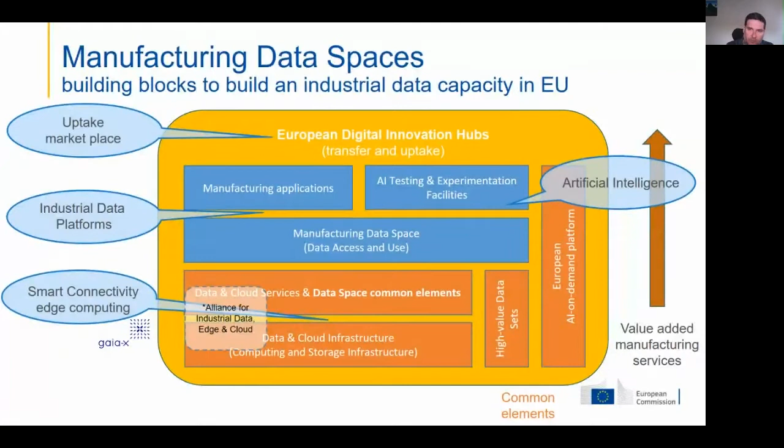On top of this, we want to make sure that there will be a transfer and uptake, not only by leading innovative companies, but by a vast majority of companies. And that comes with a number of technologies that we want to put in place along this development.

Now, we have selected two kinds of scenarios. One is a scenario of data spaces along the supply chain. Here, the idea is to have a very large number of different stakeholders, from suppliers to customers, to engineering, with proper collaboration between the different actors along the supply chain.

It might be on the communication of bill of materials, of opening order books. And you see this is really here testing, developing, starting from an embryonic data space to enrich these.

And then a second scenario, similar to some use cases found also in other platforms, which is more a scenario of asset management, where we would see a reduced number of stakeholders involved.

The manufacturer production site, who owns the machine, and that machine would provide its deep internal data to the machine supplier. So that means we already have two parties.

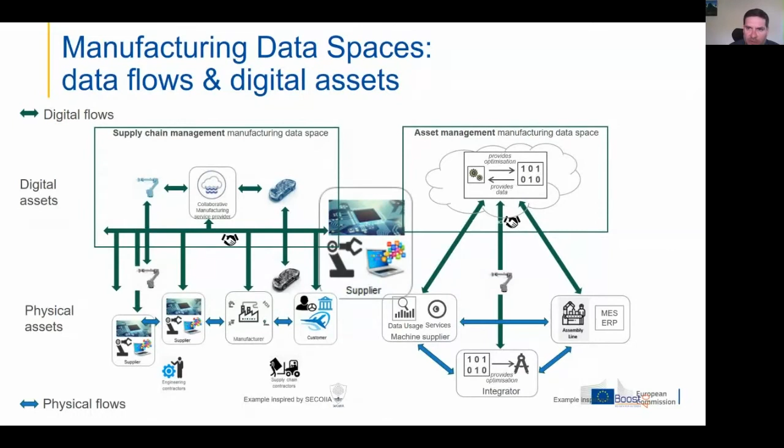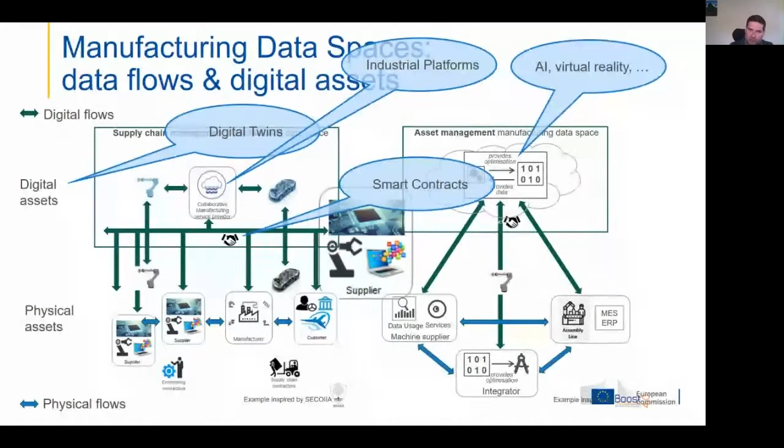And that gives a range of possibilities to deploy further a number of digital technologies, such as digital twins and smart contracts.

We have so far had a number of workshops together with you, together with manufacturing industry, together with suppliers of data platforms. The thing that we need to realize is we want to start small, but we want to scale fast. That's why we want to start from existing embryonic data spaces. The Digital Europe program, from which we are going to finance this, is not a research program. I really stress it is not a research program. So we need to have solutions which really start with existing industry agreement, which help to build a platform

that provides value to the manufacturing industry right away. That's why there is a need to understand what is the customer value when these designs are put in place. There are standards like the administrative shell from RAMI, which is currently being standardized from a number of points of view, from the semantics, from the ontology, as well as from the functional point of view. There is really a need to select these existing standards and to implement them.

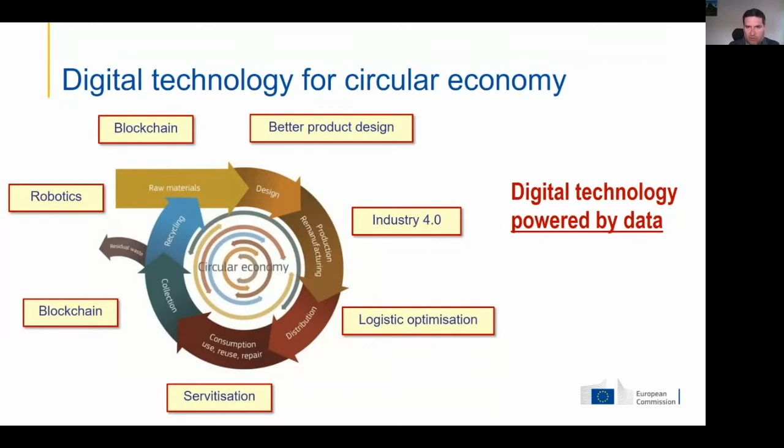This is not to be underestimated. At the same time, in Horizon Europe, we need to build the next generation of core digital technologies, not the technologies to be adopted maybe today in the manufacturing industry, but tomorrow. And that goes from microelectronics to photonics to AI to networking to high performance computing, with a number of efforts going beyond what is the current state of the art.

That's a research program. So that's really here, also when developing the next generation of chips, because they will be more power efficient, or they will provide more real-time features. It is also interesting here to have a number of use cases from the manufacturing industry to show, and to make sure that the core digital technologies will also be developed so that they serve a number of use cases in industry.

And really, once we have gone through all of these funding programs, the Digital Europe program to build the capacity, the research program to make sure that we have the next generation innovation, we also need to make sure that all of the companies across Europe would have the possibility to acquire the digital innovation, that they have really the right technology for the right purpose, which corresponds to their needs. We're not talking here of a transfer of innovation to go to market. It's really finding the needs of SMEs and helping them to go through a digital transformation.

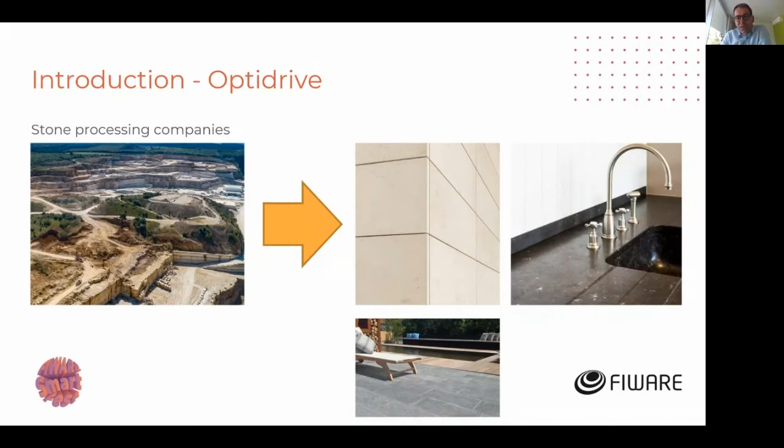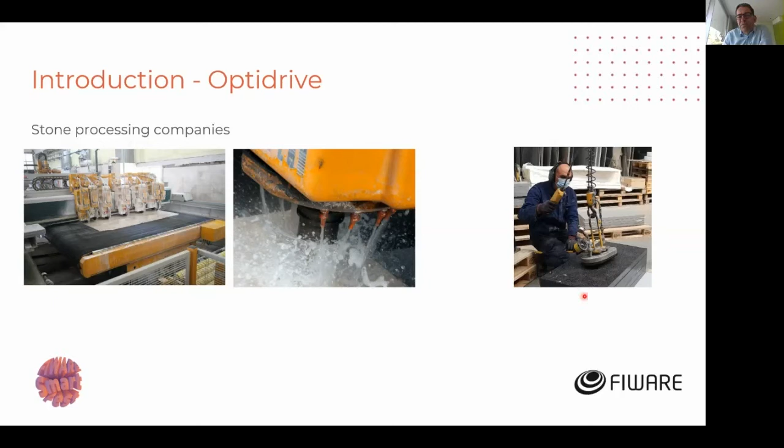Stone processing companies is the first thing I will explain. Natural stone is extracted from the earth in quarries, and finally the products are used for wall cladding, tiles, kitchen worktops, etc. The stone processing companies make brute stone into these products with different kinds of machines. Here we have a cutting machine, the laser cutting machine, or CNC machines. But finally, there is a lot of manual labor involved also.

My company brings robot automation into this environment. For example, here we have a robot for edge finishing of a stone slab. Here we have a robot for tending CNC machines, bringing the products in and out of CNC machines.

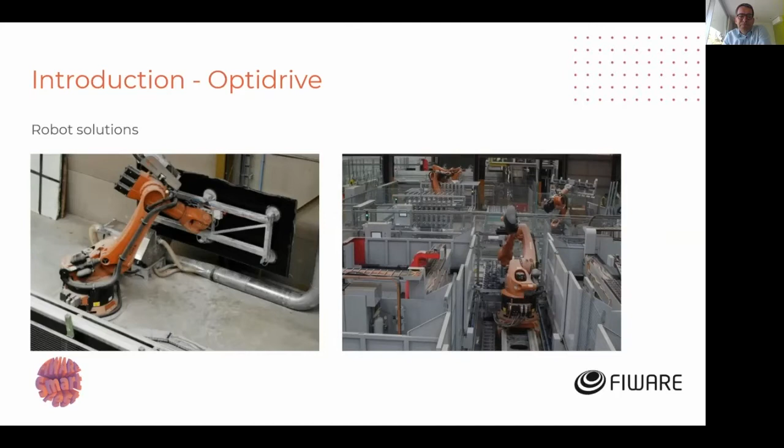The technology transfer experiment we did is within the framework of digital innovation networks. We participated here with the experiment, technology transfer experiment. Basically, the technology transfer experiment is about testing FIWARE components in a real industrial environment, specifically for us with robotics involved.

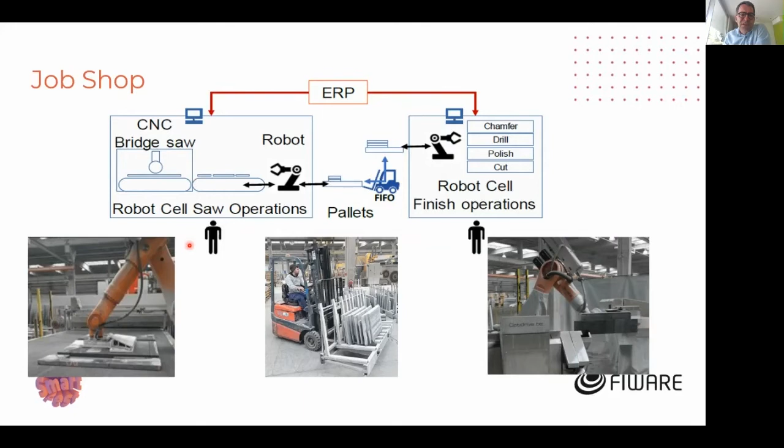The stones are moved around the factory just with the FIFO system - first in, first out - the stones are waiting to be processed by a certain production cell. The information flow is top down, or is in one direction. So the production cells receive information from the ERP system, but there is no information going back. And there is also no information from one production center towards another production center. That was not existing. This is a typical situation in manufacturing companies.

Within the technology transfer experiment, we transformed this towards the smart factory concept. We introduced the FIWARE components, the context broker in the middle with the data, containing data, communicating with the ERP database. The robots are bidirectionally connected with the context broker. And we introduced several smart services. Very straightforward, a monitoring service, a dashboard to see what's happening in the production.

Our client was very interested in this smart service - it's a manufacturability check. This check will verify whether a stone can be produced or processed by this finishing operation cell. Is it possible to do this stone with a certain size and a certain combination of required finishes? Is it possible to do this with this robot? You have to know that a robot is non-linear, has a non-linear behavior, and it's difficult to predict whether a certain size with a certain combination of operations is possible with this robot. This smart service will check that.

This check can vary in time. For example, a drilling tool is not available for the moment because it's broken. Well, then this smart service check will, for this time being, say that this stone cannot be done by this robot cell. Later on, maybe it's fixed, and then it's possible.

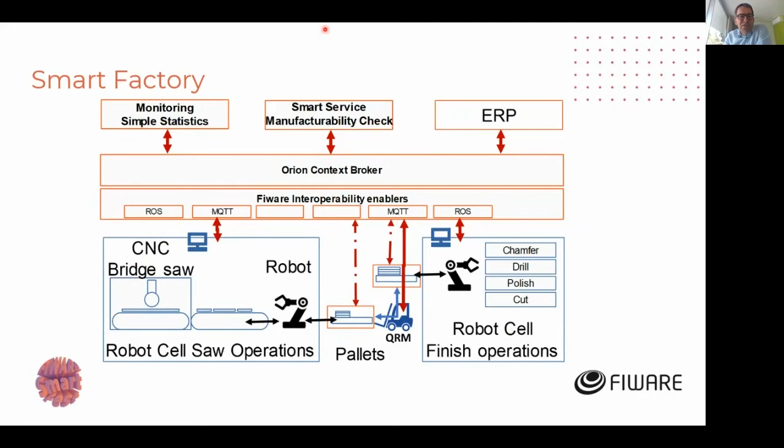Then another smart service is the logistics - the path or flow of the material - done with the QRM logic, quick response manufacturing logic. It's also a smart service. And for the operator on the manufacturing floor, it's very easy to verify. He takes his smartphone, checks a barcode, and immediately sees the priority of this pallet, where the pallet has to go. Without stress, rush orders can be done. So this is all the concept of a smart factory.

At the end of my presentation, we will show you the video where the success of the experiment is explained. Before that, I will finish my slideshow and explain the outcome of the experiment - we made a connectivity kit for KUKA robots. This is open source, available from this website. It is a connectivity kit that with tutorials easily explains how you can connect KUKA robots to the context broker. And if you do that, you have access to all other applications in the RAMP marketplace to make a dashboard and other interesting things.

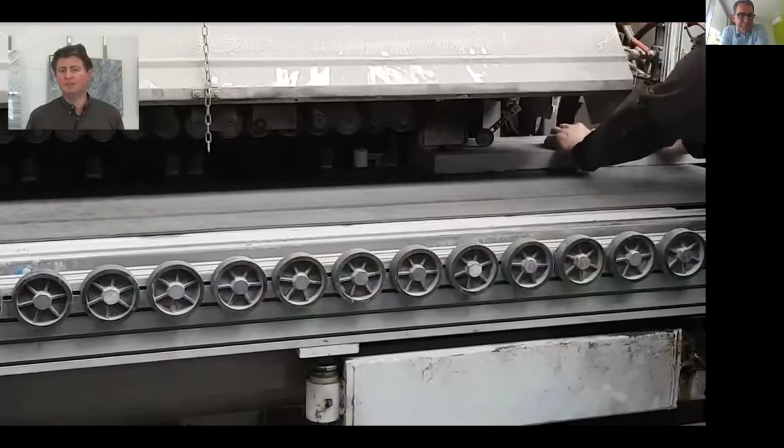René Natuursteen is a natural stone processing company located in Belgium. We produce high-end made-to-measure products like wall coverings, windowsills and kitchen tops using a lot of CNC work tool machines.

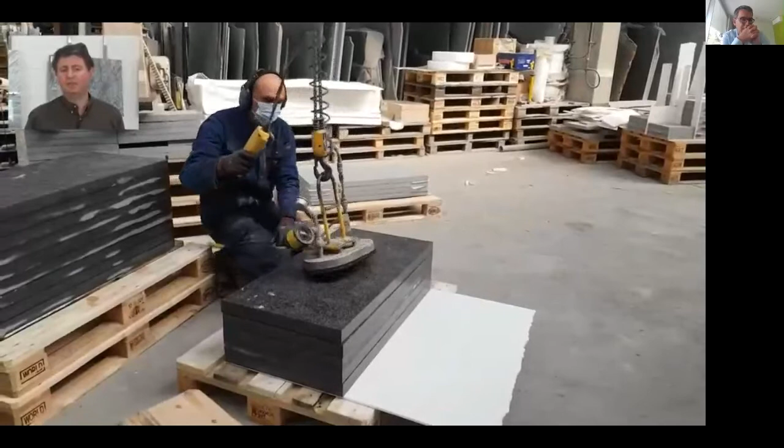The challenge for René is to produce high-end quality components in a very agile way and on a competitive price level. In other words, we need to be able to have a short turnover time and at the same time make sure our products are of the highest possible quality.

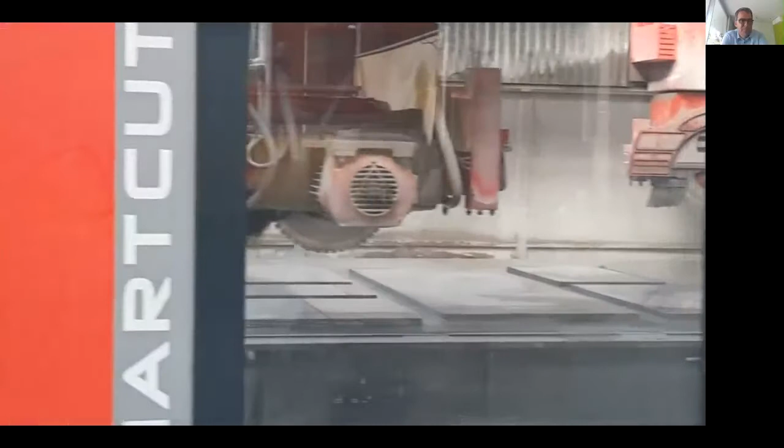Optidrive is a robot integrator. In this project, we integrated 2 robot cells in a smart factory concept. We did this by connecting the robot cells with a cloud database. We used the FIWARE standard and a Grafana component from the ramp. In this context, we developed 2 smart services: the manufacturability check and the quick response manufacturing service.

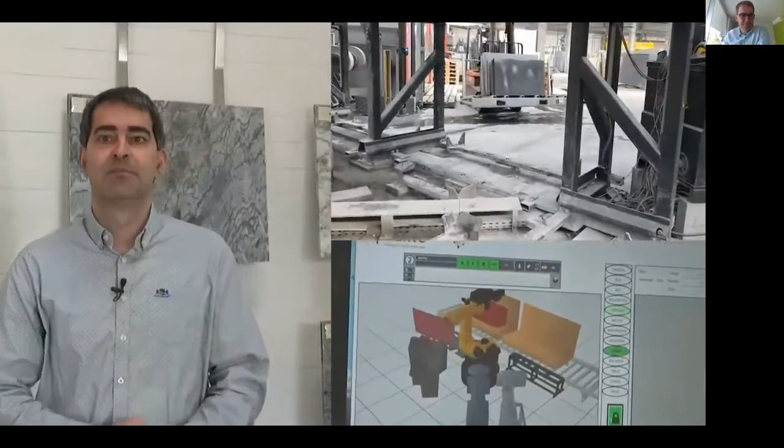There are 2 dashboards, one for the robotic cells, one for the pallets. All dashboards can be accessed from any device and also by scanning a QR code.

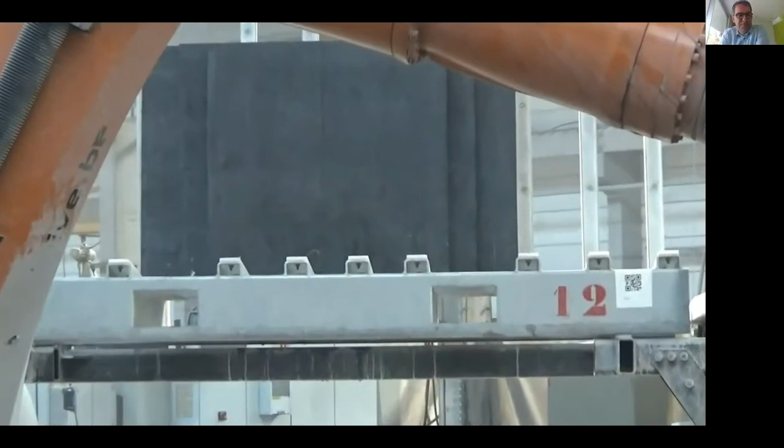During this project, we discovered the FIWARE standard and the Grafana components from ramp. We hope these become the EU standard for digital manufacturing. Starting from today, our robot solutions will be compatible with it.

We are very satisfied with the results of this EU project. Quick response manufacturing together with the Grafana dashboards mean a major step forward for us in efficiency and cost saving. The manufacturability service is a major step forward for us and a huge cost saver.

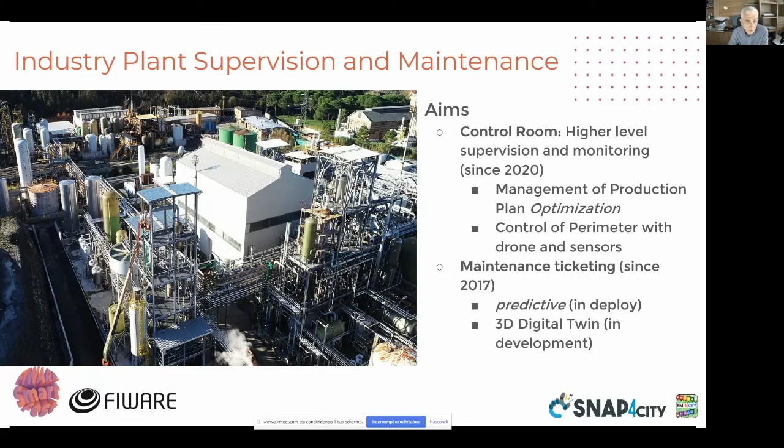The goal was to set up the control room for high-level supervision and monitoring. It has been operative since 2020 with the management of the production plan, optimization, and also control of the perimeter with drones and sensors. Since 2017, we are also managing for them the ticketing for maintenance. We are adding predictive maintenance and 3D digital twin in connection with the maintenance and monitoring of the data sensors.

So the architecture is represented in these slides. This is a functional architecture based on microservices that exploit the FIWARE component Orion broker.

And so we collect OPC UA and Modbus data from the field, and also from administrative servers, the information regarding the new product and business to be produced by the plant. So also the energy is also a cost to be taken into account, and some sensors arrive from drones for monitoring the perimeter through a LoRa gateway that pushes out to the NGSI Orion broker.

So inside we have storage, obviously, and support for digital twin and maintenance, and also data analytics for predicting maintenance and production plan optimization. For the front end, we use the dashboard builder, Snap4City dashboard builder, to show a larger set of dashboards and synoptics and 3D, and also Kibana open distro for the maintenance intelligence tools.

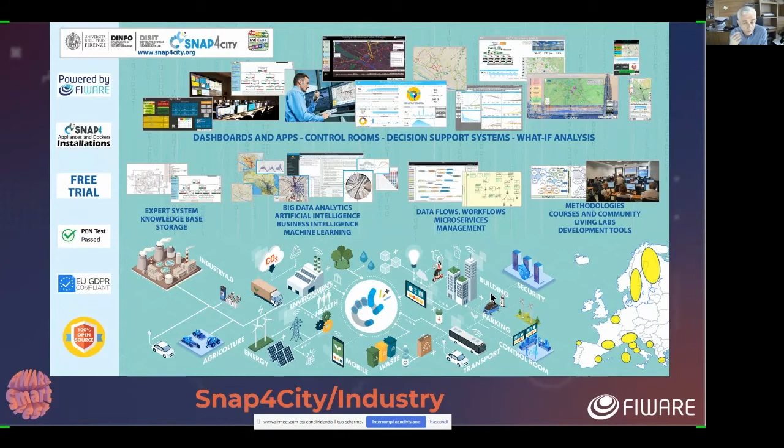So this is one of the first plants that we have done, exploiting the Snap4City solution that is powered by FIWARE, GDPR compliant, fully open source, that collects any kind of data and integrates data flow and workflow in the mechanism, not only for dashboards or data analytics, but also in an integrated manner to manage data flow and workflow. I am going to show you in more depth how it works.

The Orion Context Broker is the central part of the data gathering. All the data coming from the field and from the administration, and also from the devices, drones and so on, arrive in the storage passing through the Orion Context Brokers.

We also have IoT applications using Node-RED, installed on the edge for data transformation, which also produce messages in NGSI through the Orion brokers, and exploit other microservices of the infrastructure. The data analytics are containers scheduled and managed by Node-RED and IoT apps, which also produce results, pushing the data through the Orion brokers into the storage.

So the architecture has a number of containers with the IoT apps, also for the business logic of the several dashboards, and for managing data analytics, all with a uniform programming language, Node-RED, as you see here in the slides, in which you can create a data-driven process, data analytics, exploit the Smart City API, exploit business logic in the dashboard, govern the workflow in digital twin, and manage all the process, including the scheduling.

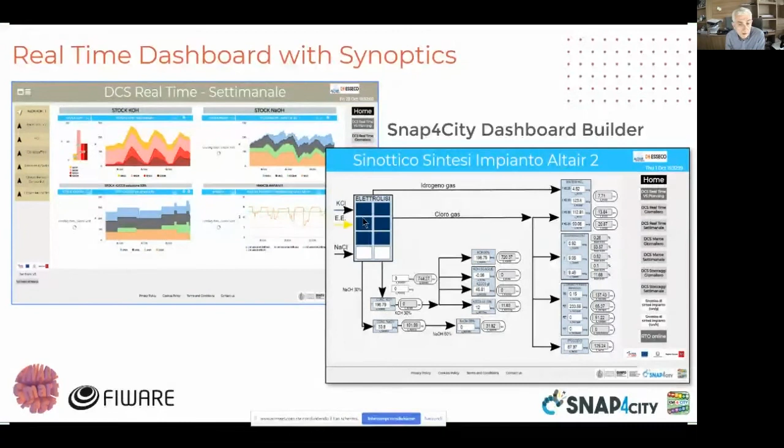So what you obtain are dashboards, several kinds, with trends, maps, and also synoptics, with end-to-end secure communication, with WebSockets secure and also HTTPS secure.

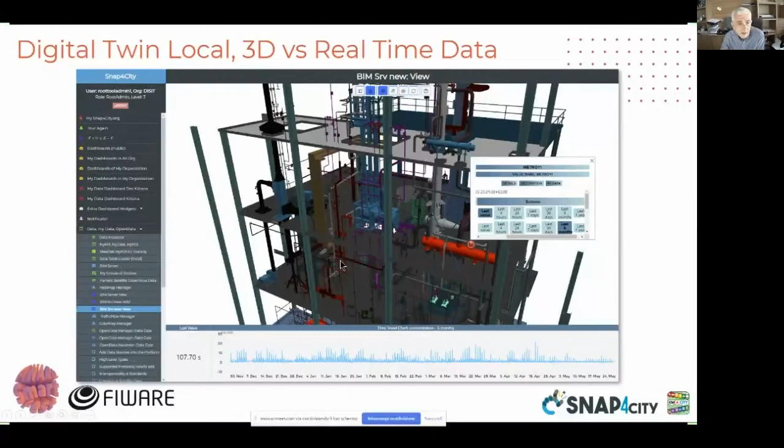In addition, we added a local digital twin. We had already developed something for showing 3Ds in the maps and so on, but recently we added the possibility to navigate in the plant, to have the real-time data, and to integrate this information in the dashboard, so that you can pass from the global to the local digital twin, and from the actual data recovered from the storage, exactly attached to the elements in the 3D.

In this way, when you have problems, when maintenance detects problems, or predictive maintenance predicts some problems, it's also possible to see exactly which area or which devices could be replaced, and where they are located, with navigation in the 3D shape.

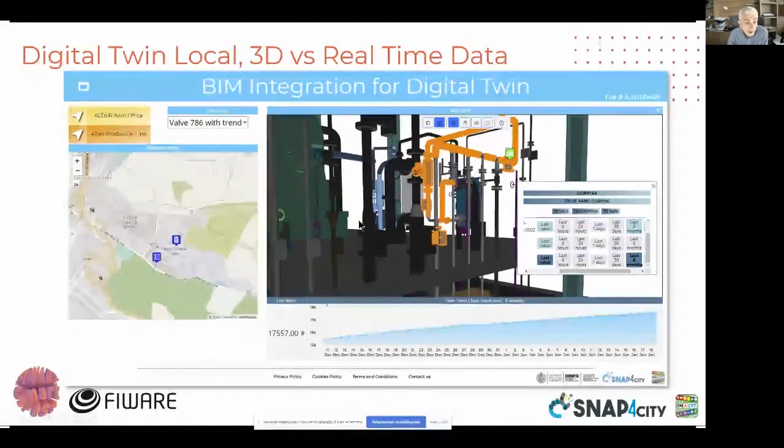So, as you have seen, the Orion Context Broker is central in the Snap4City, Snap4Industry solution. Orion enables the interoperability and ingestion of data coming from the field, with robots, sensors, actuators, drones and so on, but also with the control system, distributed control system, SCADA.

Most of the data are also transformed on IoT Edge by using Node-RED with the library of Snap4City, and they are both adopted in the IoT Edge and on cloud. You can also have some business logic to govern the logic behind the dashboard, and exploit data analytics. It is also another aspect.

So what we have at hand is the infrastructure and the solution. Presently it is used in a number of industry installations, all of them exploiting the Orion Context Broker, in all cases, both on-premise or on cloud. Some of them are directly on-premise of the company, because this is mandatory in most cases for industry.

It's also possible to make online development with low or no coding for the data analytics part, but all the rest needs very low code to create the solution. For this reason, we think it is an easy way to develop a smart and complex solution with large interoperability, exploiting the components of FIWARE, but also the capability of Node-RED, and the dashboard with synoptics and visual analytics, and also Kibana, which is a sister of Grafana in the open distro, is very powerful.

One pilot for Embraer, so in the aerospace industry, and the other one for manufacturing with ThyssenKrupp. What I'm going to present is the second one, so what was developed for ThyssenKrupp, and especially for the lift division.

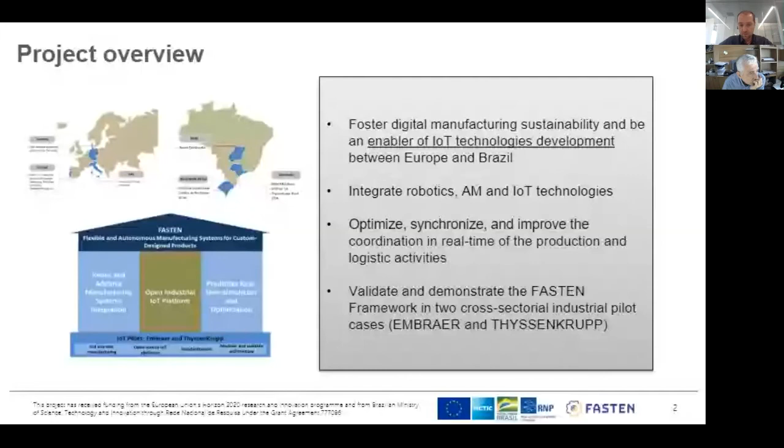Okay, the problems to solve here are mainly different. One is related to the communication between, in Brazil, the back office and the manufacturing area. So the idea here is to use the IoT platform in order to enable this communication.

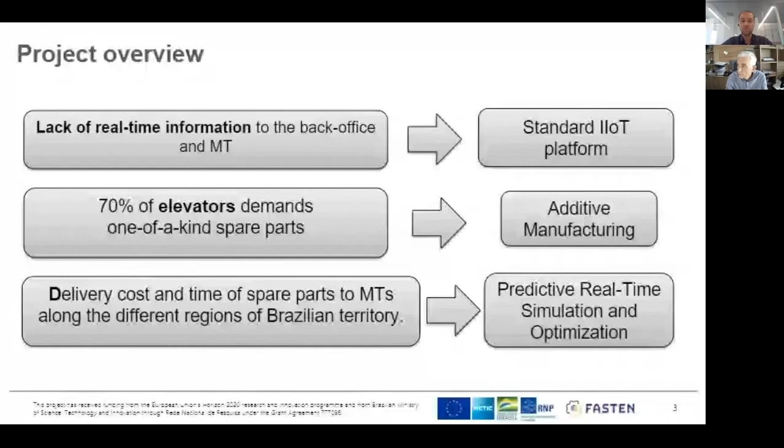Another topic is that more than 70% of the elevators demand one-of-a-kind spare parts. So conceptually, having a unique warehouse for the spare parts is inefficient in terms of cost effectiveness.

And so the idea here is to use additive manufacturing in order to produce the spare parts when needed. Last but not least, Brazil is a very big country, and so the cost and delivery time of spare parts is too much, especially because the infrastructure is often not well developed.

And here the idea is to use a predictive real-time optimization and simulation tool in order to allocate the production in a specific distributed cell in the country.

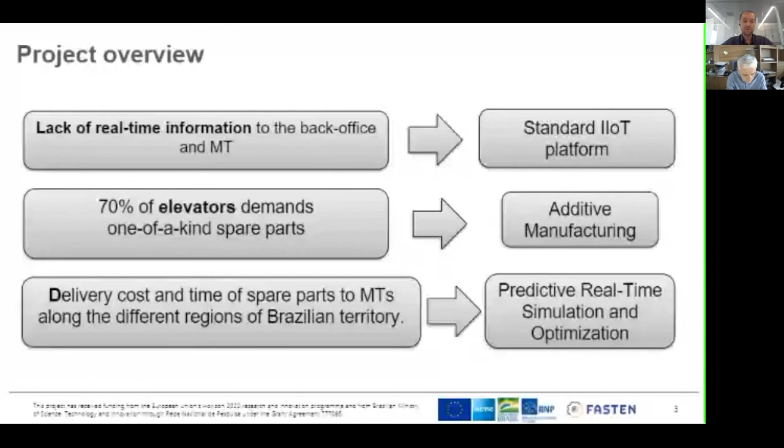What I mean by cell, these are the cells. So the idea is to create different cells in Brazil. These cells are called SRAM, so Smart Robotic Additive Manufacturing Cell. They could be different, but mainly there is the presence of a robot, an AGV, and a 3D printer.

So the 3D printer receives the order to produce a specific spare part. The robot takes the piece, places it on the AGV, and the AGV then delivers the piece first to the little warehouse nearby the cell, and then from there the delivery can begin, delivering the component to where the failure occurred.

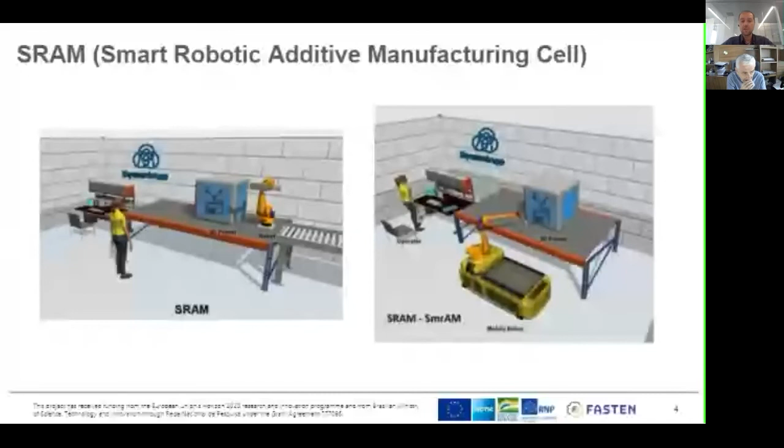So there are different cells, and the idea is to allocate and distribute them in the most optimized situation as possible. This allocation was done using a specific simulation and optimization tool in order to cover the major part of Brazil, taking into account different constraints, for example the presence of infrastructures, and the number of elevators in that specific part of the country.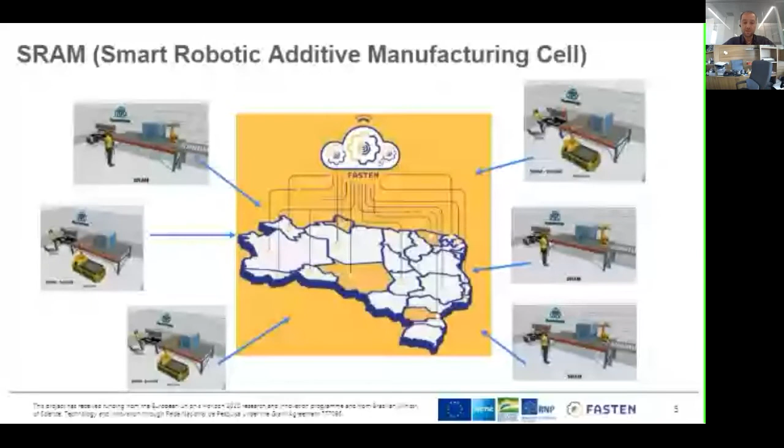So the idea is to promote the diffusion of open IoT platforms. Overall in the project, and specifically in this case in Brazil, a double perspective was carried on: the use of FIWARE and the use of Apache, testing the interoperability between them.

This is more or less the concept of the project. In the bottom part, there are the SRAM units. All the units communicate through an IoT platform with the higher level, mainly the legacy system of Thyssen, an optimizer tool, and the real-time monitoring and performance management tool. So mainly here there is a part of real-time monitoring of the cells.

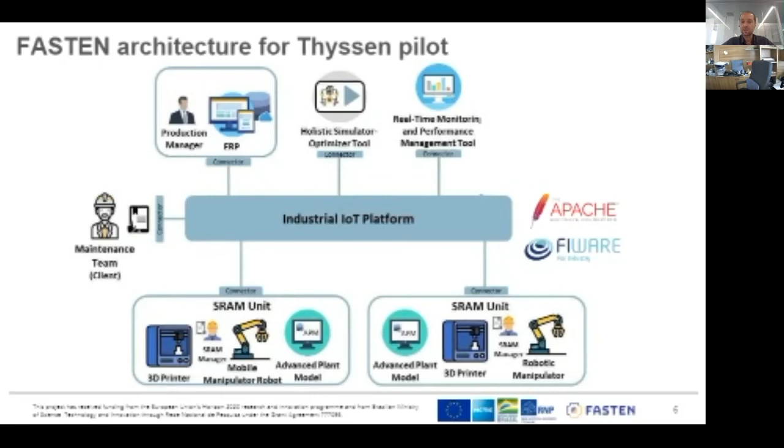As I said, we developed a hybrid infrastructure composed both with FIWARE and with Apache. On the left part of the slide, in blue, there are the FIWARE lanes, which are mainly related with real-time monitoring and presenting information of all the cells in Brazil. There is a FIROS interface developed to communicate with the robot and the 3D printer, the Orion broker, CrateDB, and then a Grafana dashboard to present real-time data from the SRAM.

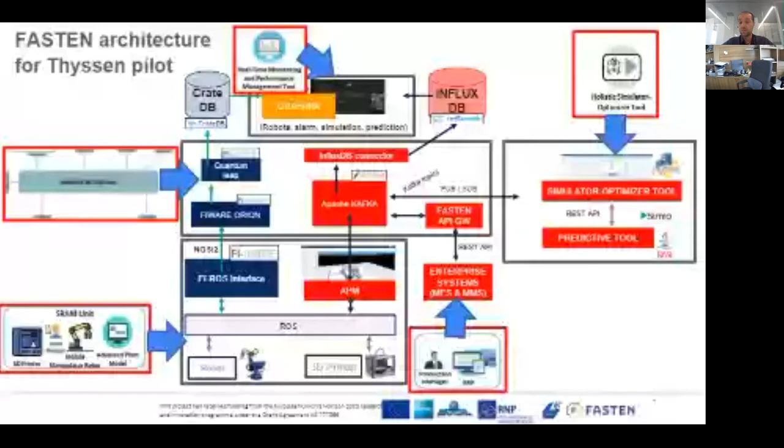In red, on the right part, you can see the Apache Kafka lane. Here there is the APM, which is mainly a container of all the information and resources of the cell. This block also enables a digital twin representation of the cell. Using this lane, there is not only the possibility to view the digital twin while the real system is running, but also to communicate with the modules developed during the project, so the Holistic Simulator and Optimization tool, and also communication with the enterprise system.

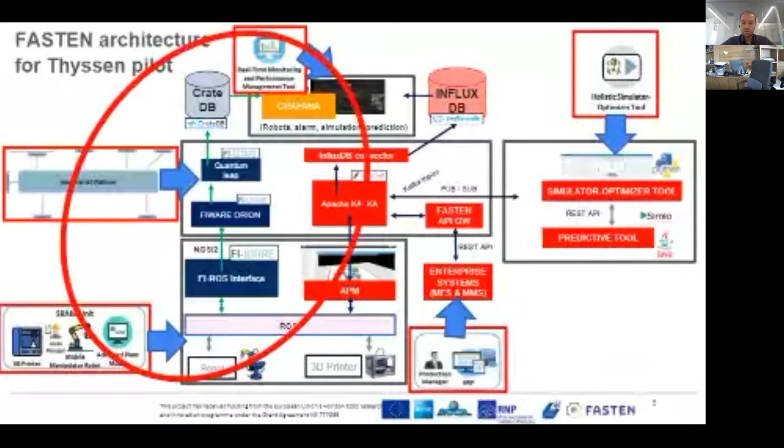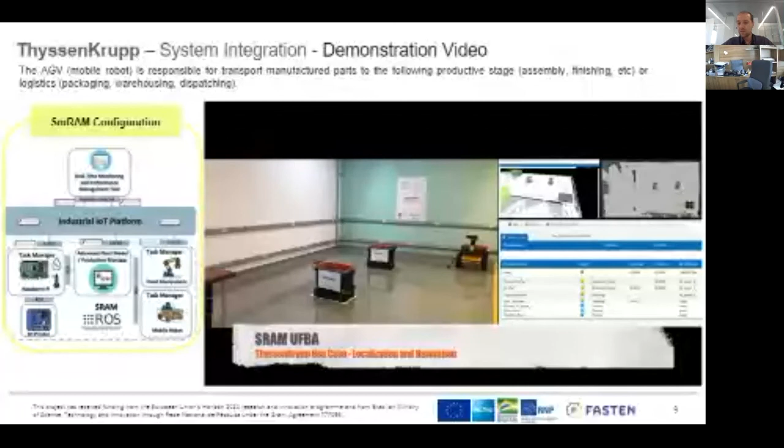It is also possible to see, changing the interface, the real-time dashboard using the FIWARE lane of all the parameters that are gotten from the field. For example, the duration of the printing activity, the time left to finish the additive manufacturing activity, so the spare part printing. On the bottom side, there is all the instrumentation that manages the information around the cell, giving information, for example, about the production and the scheduling of the production.

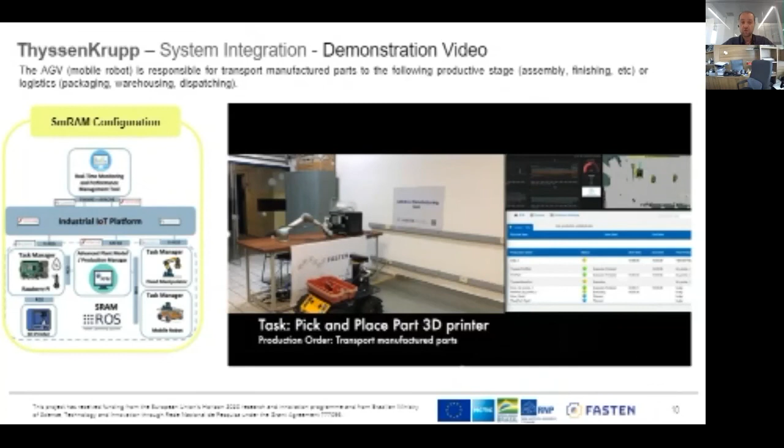On the right part, we have, as I said, the Apache Kafka lane. This lane is more related not with data in motion but data at rest. The idea is that the maintenance operator communicates with the legacy system, with the ERP of ThyssenKrupp, asking for a specific spare part.

The production manager uses the holistic simulator tool in order to get the right SRAM to produce the specific spare part. This logic works according to, for example, the availability of each SRAM cell and using the nearest SRAM cell to the location where the spare part is required. Then the production manager could trigger the SRAM operation, and the cell autonomously produces the spare part. All this information is managed using the Apache Kafka lane.

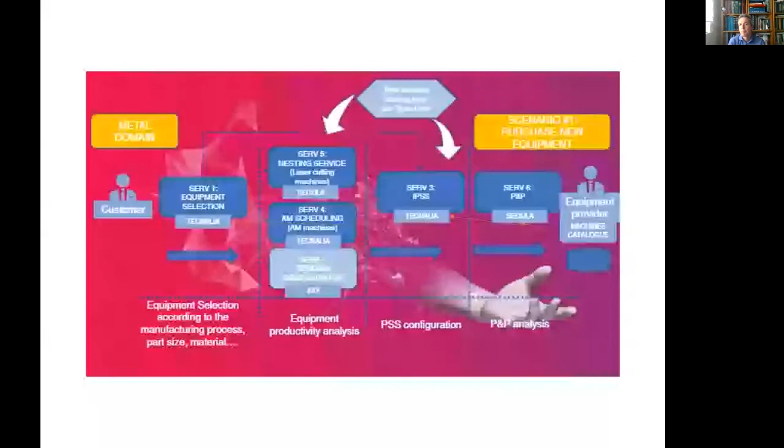The idea is it's difficult to make a marketplace for all these different domains and manufacturing processes. Our approach: on the left-hand side we have a customer who wants to purchase equipment, on the right-hand side we have many equipment providers. The customer takes a journey to define what equipment he requires, looking at many different types of equipment. We try to help the customer connect with the equipment provider through services that support his decision making.

First, on the left-hand side, we have equipment selection depending on the manufacturing process, the part size he wants to produce, and the material he wants to use—it's not the same stainless steel or titanium. So he can browse and pre-select the equipment.

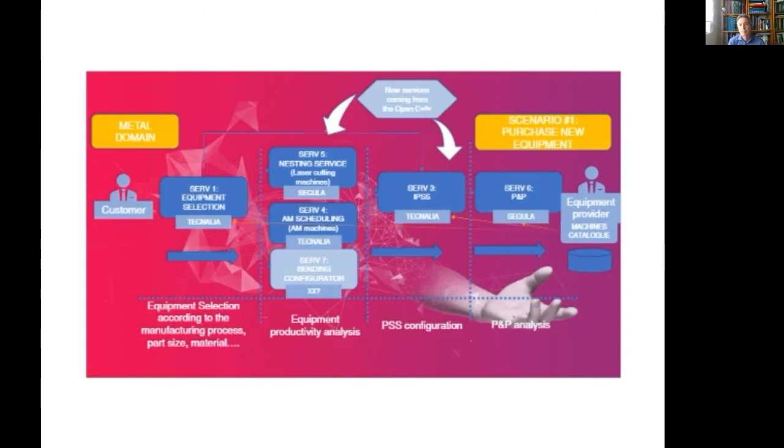Then there is a second set of services dealing with equipment productivity, analyzing the characteristics of that pre-selected equipment. There are different services for different manufacturing processes—analyzing a laser cutting machine is not the same as an additive manufacturing machine or a bending machine, etc.

After that, the customer usually wants certain product service systems implied in his equipment, and we have another service that helps with that. At the end, we have services that help interconnect that equipment with the existing IT infrastructure of the company.

This process usually takes the customer one year to complete. The idea is that Market 4.0 helps him do this shorter, more seamlessly, and more comfortably. Of course, we are not addressing here all the different manufacturing processes.

That is why there are open calls and new manufacturing processes are being addressed, and new ones will come later. So new services will be implemented.

The idea here, as somebody said before, is a distributed cloud of services according to the European data strategy—I think Mr. Kovacs said that. We are based on the IDS reference architecture, which I think you are aware of, so I will not go into details. It's based on the IDS connector, a generic enabler in itself.